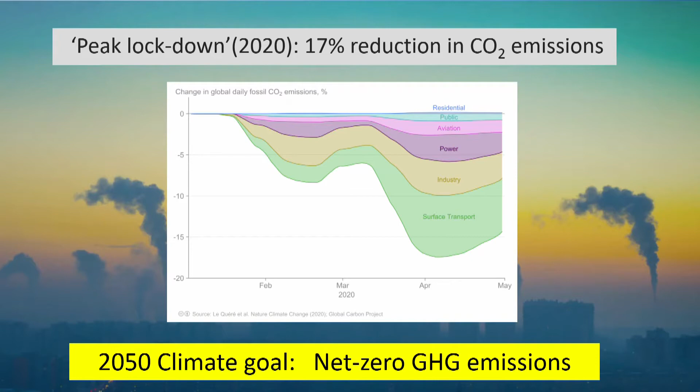A second point. Next slide, please. Some people say, yes, technology is important, but actually we have all of the technology that we need, and what's really lacking are the right policies and the political will in our various societies to enact those policies. And for some people, the most important such policy would be a robust policy for pricing the carbon emission externality, or the greenhouse gas emission externality.

But while it's certainly true that there is much we can and must do with existing technologies, in fact, we don't have all of the science and technology that we need. There are many hard problems still unsolved, for which economically viable solutions, or in some cases solutions of any kind, do not now exist. Next slide, please. And please build the slide - there are 2 or 3 builds, and just to save time, could you go through the next 2 or 3 slides?

Thank you. For example, solving the central problem in low-carbon electric power systems of achieving a real-time balance between supply, which fluctuates because of the intermittency of solar and wind - and this will become more important as they take on more of a role in our electric power systems - and demand, which of course fluctuates because we don't consume electricity at a constant rate throughout the day or throughout the year. How will we achieve this balance without natural gas or other fossil fuels to keep things in balance?

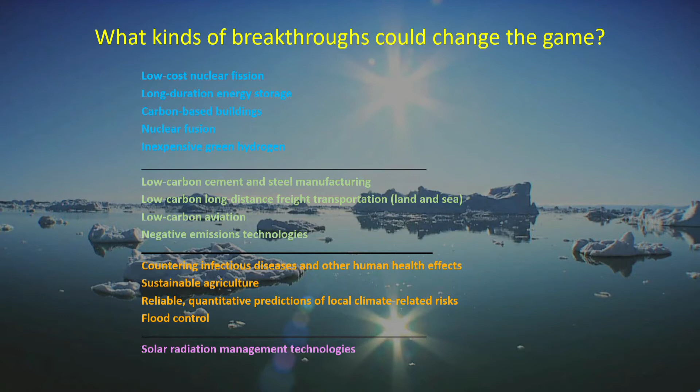So yes, we have existing technologies that we need and must use, but there are new problems that must be solved with new science and new technology. A third argument against innovation, next slide please, is that there isn't enough time for it - we need solutions right away. And it is true that we're facing an emergency and that there is indeed no time to waste.

We must do what we can immediately, and it is also true that innovation can't happen overnight. In fact, it takes many decades to transform huge global systems - transportation, electricity, industry, buildings, and so on. But if we tried to do this with existing technologies, it would be extremely expensive. And so, as we consider in this session the role of nuclear energy in addressing these challenges, I hope we'll be able to consider all of these issues and all of these questions.

And now let me very briefly introduce our very distinguished panel. We have four leaders in the nuclear field from Japan, from the United States, and from the Nuclear Energy Agency in Paris. Our first speaker will be Dr. Bill Magwood, Director General of the Nuclear Energy Agency. Next, Dr. Jill Engel-Cox, Director of the Joint Institute for Strategic Energy Analysis at the National Renewable Energy Laboratory in the United States. Our third speaker will be Dr. Ashley Finan, Director of the National Reactor Innovation Center at the Idaho National Laboratory. And our final speaker will be Nakatani Eri, Acting Director for Nuclear Technology in the Nuclear Energy Policy Planning Division of the Agency for Natural Resources and Energy of the Ministry of Economy, Trade and Industry of Japan. We'll go through each of these four presentations, and then we will look forward to a period of discussion among the panelists and hopefully questions from the audience. Thank you, and let me now hand over to Dr. Magwood. Bill?

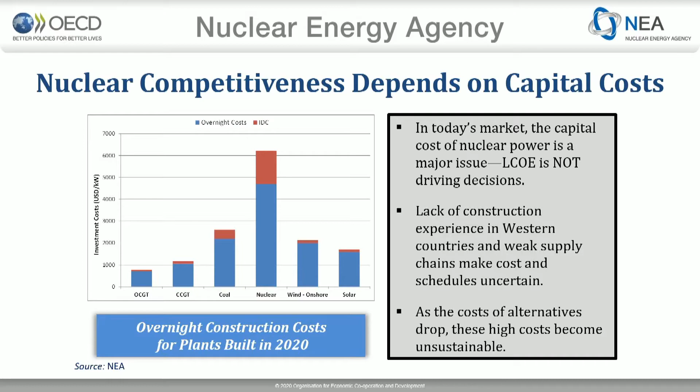However, what we also see is that countries are moving in a different direction in many cases. Many countries are focusing their attention on small modular reactors. This is, of course, a very exciting development. These new technologies promise high flexibility, manufacturability in factory, and have safety characteristics which really can be truly game-changing. Imagine a nuclear power plant that does not require off-site emergency preparedness. There are many types of designs being developed. By last count, there's somewhere around 60 different designs around the world being developed, mostly by private companies, to meet these new targets.

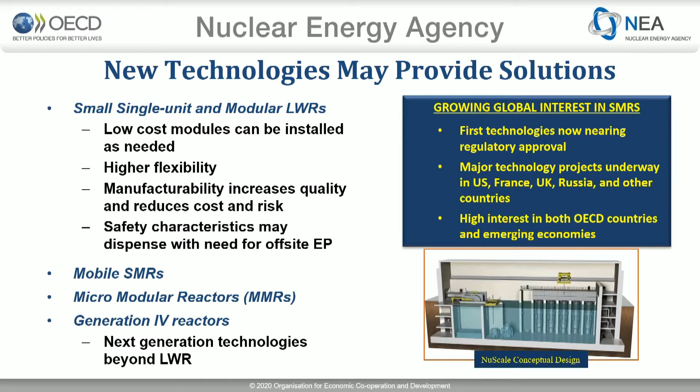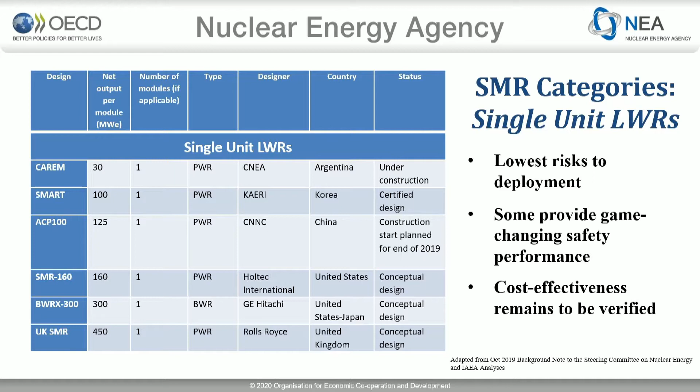Many of the technologies are what we call single-unit LWRs. These are based on LWR technology, but are much smaller. They can be deployed in a manner where they come closer to demand centers. There are also multi-module LWRs, which in some cases can look a lot like a baseload power plant functionally, but be much more flexible and much safer.

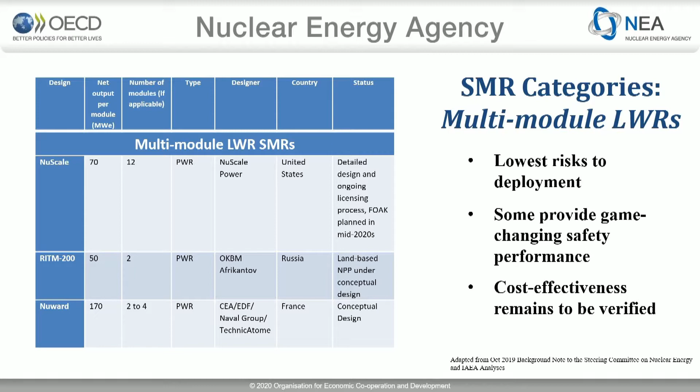There's also interest in mobile SMRs. We think this is an interesting area of technology, but there are many questions about the regulatory and legal approach that will be taken to oversee their operation.

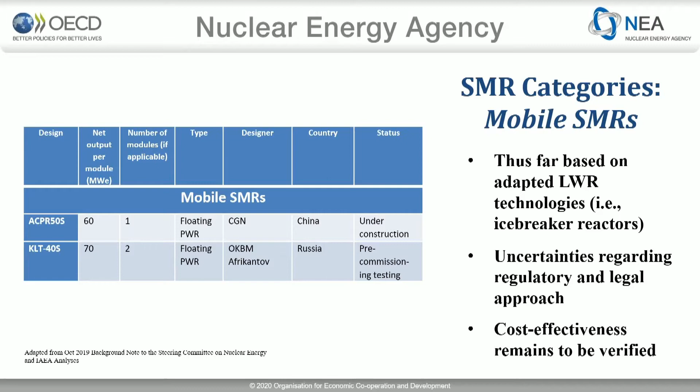Many countries are also interested in what we call micro-modular reactors. These are very small units placed near mines or small communities that require power. This is of extreme interest in, for example, Canada, which has many remote communities where it's very difficult to move fuel oil. We'll see how this transpires, because there are still many questions to be resolved.

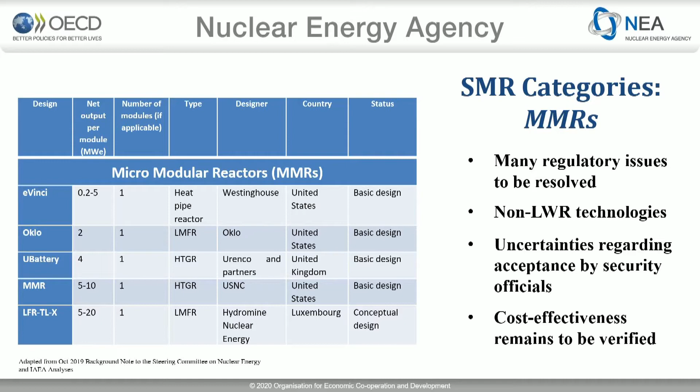In the longer term, and some think this will not be that long, Generation 4 SMRs are also of great interest. These could completely change the conversation about nuclear power by providing not just typical electricity generation, but also the ability to recycle materials and provide heat for industrial and residential purposes. There's a wide range of these technologies. They're very interesting, and we look forward to seeing which ones make it to market soon.

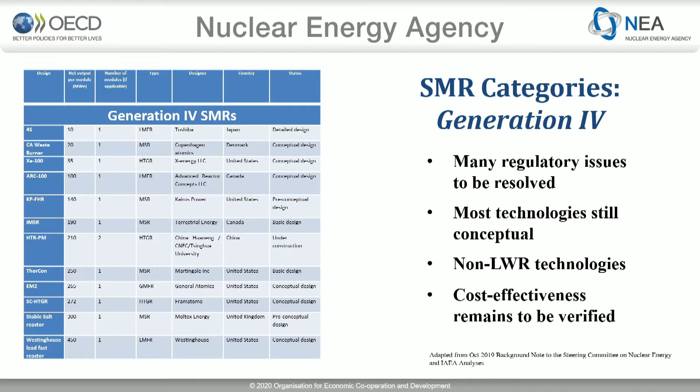But whatever technology is selected, there's going to be a tremendous challenge to do this globally. Nuclear has often been a domestic industry, but for SMRs to be successful, we're going to have to see a change. We're also going to have to recognize that if we can share some of these costs, it would be an advantage to everyone.

But if these technologies are going to be successful, they're going to need access to the world market, much like the aircraft industry. Aircraft manufacturers do not build an aircraft for one country, they build it for a global market. I think SMRs are going to have a similar outlook. Otherwise, it will be very difficult to recover the costs necessary to set up the manufacturing runs.

At the end of the day, the hardest part of this will probably be the regulators. Can regulators come together to have a global approach to licensing SMRs? If SMRs have different licensing requirements in every country, it's going to become a major barrier to progress.

I'll close with the observation that there are many NGOs and other experts who think we simply use too much energy, and that we should perhaps start riding bicycles instead of driving cars. And of course, there's been a suggestion that maybe taking a sailboat across the ocean is better than flying in an airplane. There are even those who have suggested that countries trying to pull people out of poverty and improve healthcare, improve the lot of future generations, maybe should have to delay their plans a bit in order to save the environment.

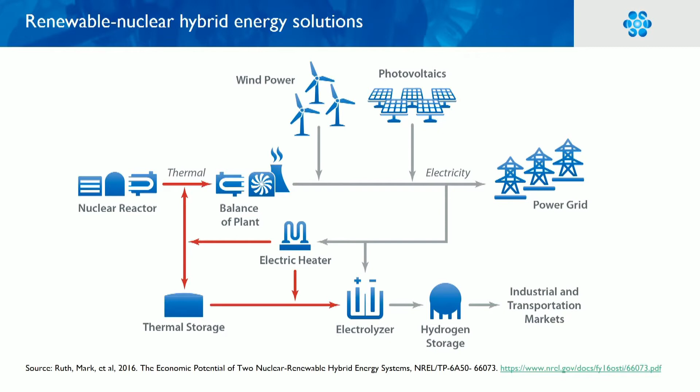This ultimately led to us getting involved with a new initiative on the Clean Energy Ministerial. We actually operate several initiatives for the Clean Energy Ministerial, and several years ago it was proposed to launch a new initiative, the Nuclear Innovation Clean Energy Nice Future Initiative, which explores the potential for nuclear energy uses, innovations, and systems integration to accelerate progress towards clean energy goals.

The initiative recognizes that there's no one-size-fits-all solution to energy, so each country will have its own different approach. The way France operates its reactors would be quite different from the way the United States may do that, as well as new nuclear countries such as Jordan.

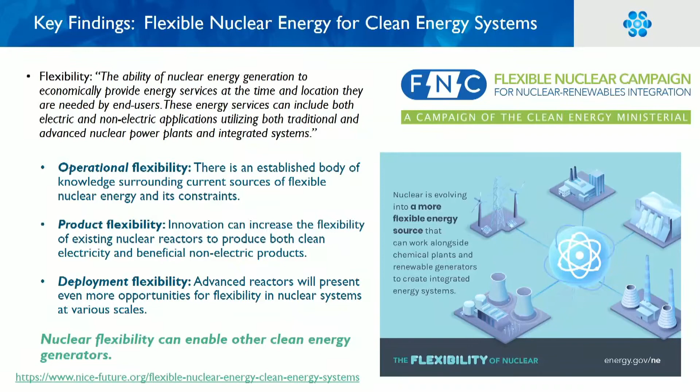Part of the flexibility is really imagining how nuclear and renewable systems can work together. It can be looking at remote communities, industrial processes, desalination, or campus power. The goal is to think about new applications at different scales, providing multiple services to different types of organizations going forward. The ultimate goal is to combine these and enable other clean energy systems, such as renewables, to create an overall energy future with lower emissions.

So thank you very much, and I look forward to answering any questions.

Hello, thank you for the opportunity to present at the Innovation for Cool Earth Forum in the Innovations in Nuclear Energy session. My name is Ashley Finan, and I'm the director of the National Reactor Innovation Center based at the Idaho National Laboratory in the United States.

You've heard from other panelists about the importance of nuclear energy innovation to address climate change. Our approach to nuclear energy demonstration, I believe, can help us demonstrate advanced nuclear technologies and prepare them for commercial use in a time frame consistent with addressing climate change.

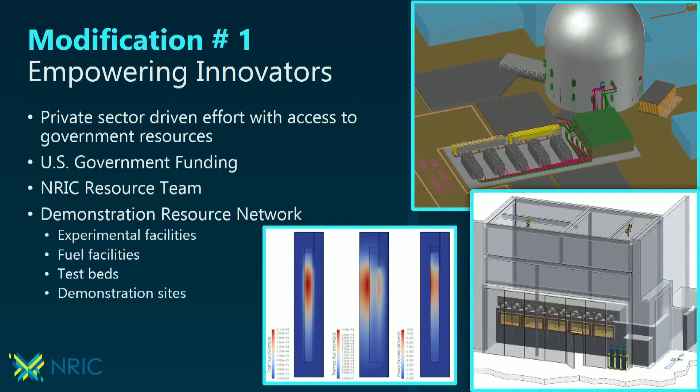This slide shows what a demonstration test bed is. The diagram shows the blue systems that are the testbed systems and the green systems which belong to the demonstration reactor and are temporary. Our role is to refurbish existing facilities to enable them to host private sector demonstrations.

The photos show two different facilities. The top right is the EBR-2 dome, which previously hosted a demonstration reactor. The left on top is the ZPPR cell, which hosted zero power physics reactor experiments and is suitable for a smaller demonstration. We've completed pre-conceptual design on these, and in 2021 we'll complete preliminary design and begin final design. This will enable long-term innovation and continuing innovation as we move forward in time, not just a one-time demonstration.

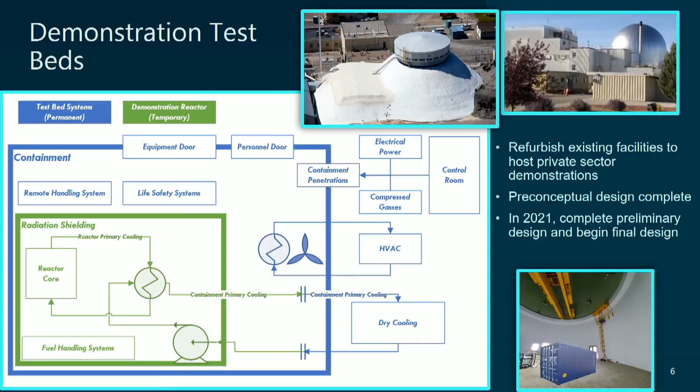Next, the next modification, number two, is addressing cost and markets.

This wasn't a strong element of the first wave of nuclear demonstrations, but we are emphasizing it now. We're using digital engineering, which has been proved to improve cost, schedule, and quality. We're working to demonstrate advanced construction technologies that could reduce the costs and schedule overruns associated with civil construction of nuclear power plants. And we're working to demonstrate integrated energy systems alongside other DOE programs in order to show how nuclear can integrate with the smart grid of the future.

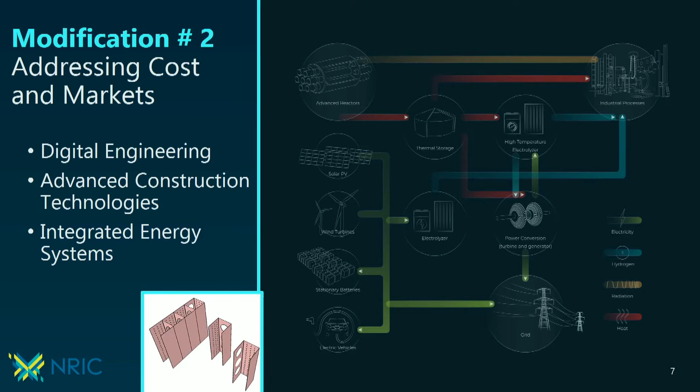The next modification that we see as vital to our success is proactive impact management. We're addressing our environmental impacts. We are here to make things better, to address climate change. We need to ensure that we also make them better in the local area and the demonstration sites.

So we're working to do environmental impact assessments by doing cultural and biological surveys of sites, by developing a plant parameter envelope that we can use to evaluate both environmental impacts and safety impacts without having the specific detailed design of the reactor ready. Instead, we're enveloping that design, taking into consideration all of the designs that we think might be demonstrated. And we're looking at water use. Idaho National Lab is located in the desert, so that's particularly important there. Also, we're looking carefully at the back end of the fuel cycle, at packaging, storage, transport, and disposition.

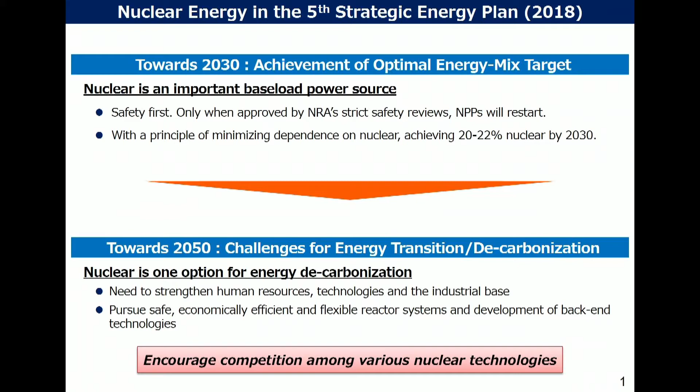However, we also recognize that nuclear power may just be one option for energy decarbonization in 2050. But two things are clear. For nuclear power to make a meaningful contribution in 2050, we need to keep strengthening human resources, technologies, and the industrial base. In addition, we need to pursue safe, economically efficient, and flexible reactor systems and development of back-end technologies by encouraging competition among various nuclear technologies.

Here, I listed 6 potential needs for nuclear innovation in this decade or decades to come. First of all, safety. The Fukushima accident tells us that we have to be prepared for any thinkable or even unthinkable events, including natural disasters. Many advanced reactor concepts talk about passive inherent safety features.

Radioactive waste management is another area to be focused on, as some reactor concepts, such as fast reactor, can drastically reduce the time of radiotoxicity. Non-proliferation also needs to be cared about, as emerging countries think of importing these new types of reactors.

Flexibility, mobility, and multipurpose use are also important when lots of intermittent renewables are introduced into the grid. Nuclear could be more flexible, mobile, and could be used for hydrogen production, heat utilization, and even energy storage. Besides complementing renewables intermittency, nuclear could be an important carbon-neutral source when the sun does not shine and winds do not blow. Economic efficiency is also important, as renewables may become zero marginal cost, as well as carbon-neutral energy sources.

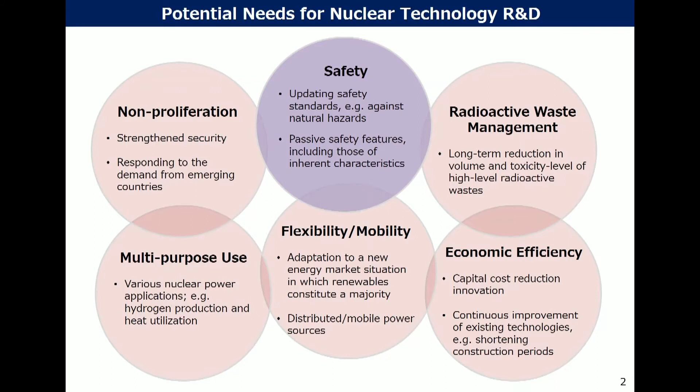Cost reduction innovation on the capital cost of nuclear is necessary. For that to happen, continuous improvement of existing technologies, as well as the solid industrial base to support that, would be important.

In order to address these needs, Japan started the NEXIP program, Nuclear Energy Innovation Promotion Program. This is an initiative initiated in 2019 to help accelerate the development of innovative technologies in the private sector through cost-shared funding support, access to R&D facilities, and human resource development efforts.

This is a joint effort supported by METI, MEXT, and the Japan Atomic Energy Agency, Japan's national lab. Through the funding support, we support private companies' feasibility studies of state-of-the-art reactor concepts, as well as associated technologies such as technologies to enhance safety and digitization, as well as new types of fuel. As for the R&D facilities and resources, JAEA National Lab can provide its state-of-the-art research facilities and share its knowledge with private companies. We also would like to enhance collaboration between the private sector and academia, as well as with the international communities.

Besides many human resources development programs we support, we also recognize this initiative as an important means for private companies to stay active and innovative. If the nuclear sector wants to attract talents, we need to keep innovating to address societal needs.

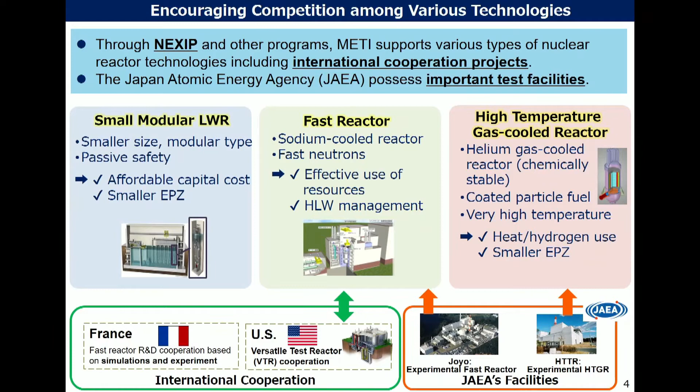Through this NEXIP program, METI supports feasibility studies of various advanced reactor technologies, including small modular light water reactor, fast reactor, and high-temperature gas-cooled reactor.

SMR, because of its smaller size and module production, has a smaller source term and a reduced construction period, which may lead to affordable capital cost and enhanced safety. The United States, as well as UK, Canada, and other countries are the most active in this field. And we are exploring new ideas for SMR, as well as opportunities for international cooperation in NEXIP.

Sodium-cooled fast reactor utilizes fast neutrons, which enables effective use of resources and reduction in radiotoxicity of high-level waste. Japan is promoting fast reactor R&D based on its strategic roadmap. In this decade, we will try out many fast reactor concepts, which will eventually lead to realization of the first commercial fast reactor around the middle of the century.

We also regard international cooperation as important in the fast reactor R&D, and we cooperate with France based on a renewed arrangement started this year, as well as with the United States on its versatile test reactor, VTR, based on the MOU signed last year. We believe JOYO, JAEA's experimental fast reactor, is expected to make an important contribution to fast reactor R&D, domestically and internationally.

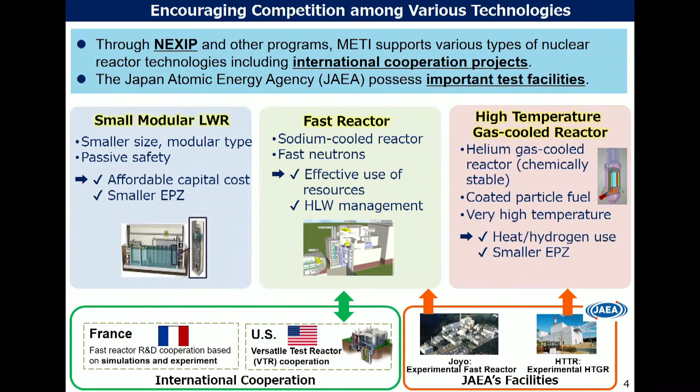The last two slides are a little bit technical, but I would like to go a little further to explain about JAEA's facilities. Experimental fast reactor JOYO, which reached its first criticality in 1977, is expected to return to operation soon after its safety review based on new safety standards passes. JOYO enables irradiation tests under controlled temperature, which could be increased to as much as around 800 degrees Celsius, and provides the highest level of neutron flux. Various test materials can be irradiated simultaneously in the irradiation assemblies under very finely tuned, high-energy neutron spectrums.

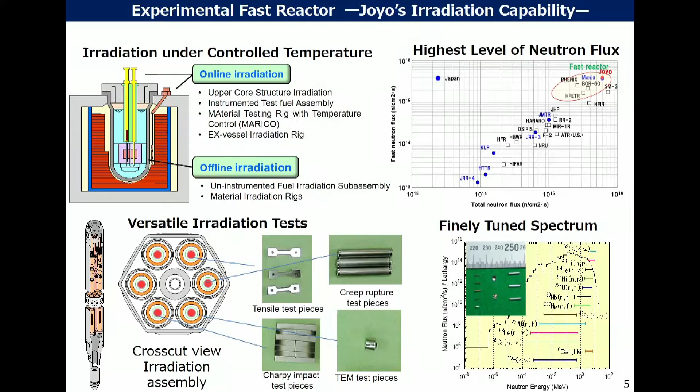Experimental HTGR, called HTTR, reached its first criticality in 1998. Since then, it has been making history. In 2004, the reactor outlet coolant temperature reached 950 degrees Celsius, the world's highest record, and achieved 50 days of continuous operation in 2010. Together with OECD countries, JAEA conducted a loss of forced cooling test, which proved that the reactor can be naturally shut down as soon as the core cooling flow rate is reduced to zero. It has already passed the NRA's most stringent safety review and is expected to restart after next year.

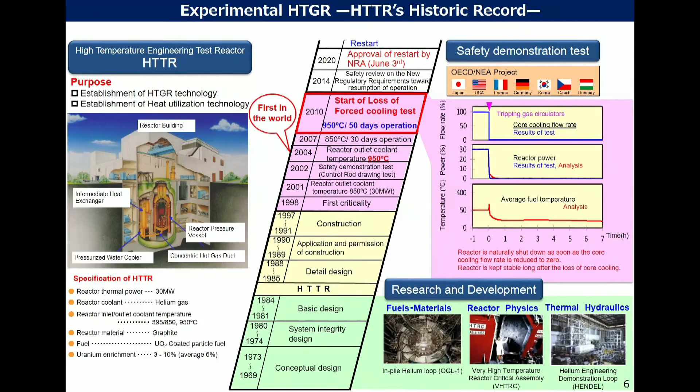To conclude my presentation, advanced reactors have the potential to address future needs besides decarbonization, such as enhanced safety, flexibility, radioactive waste management, etc. Japan, among other countries, encourages competition among various advanced nuclear technologies through its cost-shared support program. Lastly, international cooperation is the key to success. Thank you very much for your attention.

Well, I'd like to begin by thanking all of the panelists for their really excellent presentations. Clear, to the point, just outstanding.

I want to apologize to the audience, if not the panelists, for not introducing myself previously. We skipped over the introductory slide, and in case anyone didn't see it go by, I didn't see it go by either. Let me say that my name is Richard Lester. I am Associate Provost at the Massachusetts Institute of Technology, where I'm also the Japan Steel Industry Professor and Professor of Nuclear Science and Engineering.